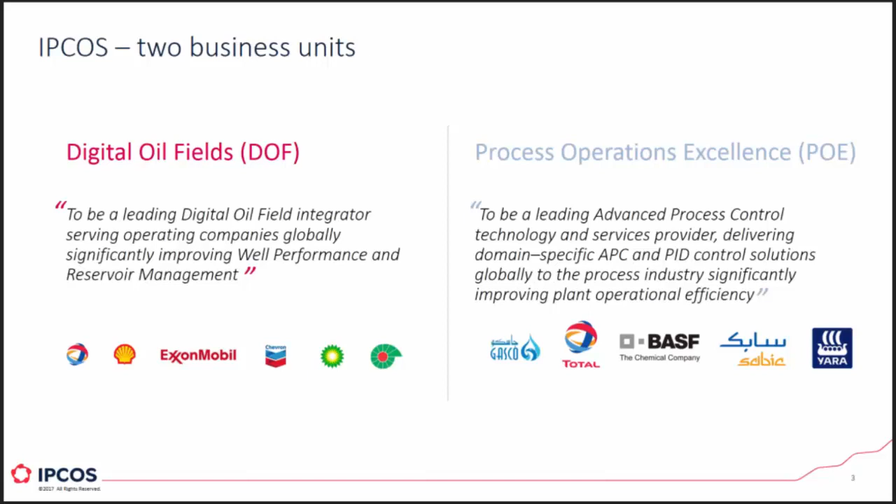In terms of our offices, we have our headquarters in Leuven in Belgium, and we have also offices in the Netherlands, in Cambridge, which is where I'm based in the UK, and we have partners around the world, and also a small office in the United Arab Emirates, a slightly larger office in India, and also a small office in Houston. So really a large reach with several locations and obviously customers spread across the globe.

Our core market is gas processing, refining, petrochemicals, chemicals, and really an emerging area now is power, waste, and utilities. That's a big part. And fertilizers and ammonia is where a lot of our APC technology is being implemented. So really, again, a wide segment of industries that we serve.

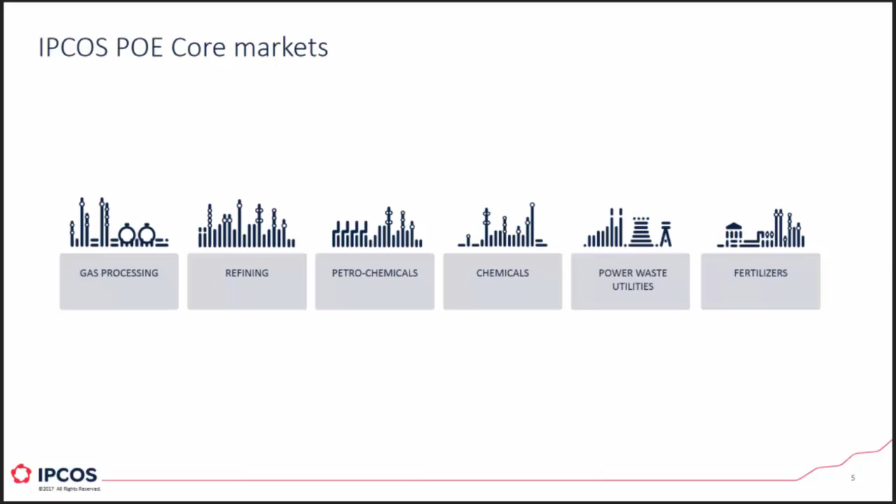In terms of our partners, in specific markets, we have partners such as Stamicarbon. In glass, we have Celsian. In cement, we have ES Processing, and we have some generic partners such as Siemens, AspenTech, and we really work with them on a case-by-case basis. We have also partners in the Middle East, such as BPC and Golden Falcon. They are, you could call them agents or partners in the Middle East, serving different countries. And we're very pleased that, having been a reasonably small company, we have a global reach.

In terms of our products, we have 2 PID tuning products or softwares that we have developed ourselves and we license. They're called Inca AptiTune and Inca PID Tuner. Inca AptiTune is a multivariable PID tuning tool, and Inca PID Tuner is a tool that is used for tuning single PID loops. Then we have Inca MPC, which is our multivariable process control software, predictive controller.

And we have Inca Sensor, which is the software used to develop inferential qualities. So if there is a product quality that you would like to measure, but there is no analyzer available to do that, then you would use a software such as Inca Sensor to build a model which can then be used to do the prediction of that particular quality.

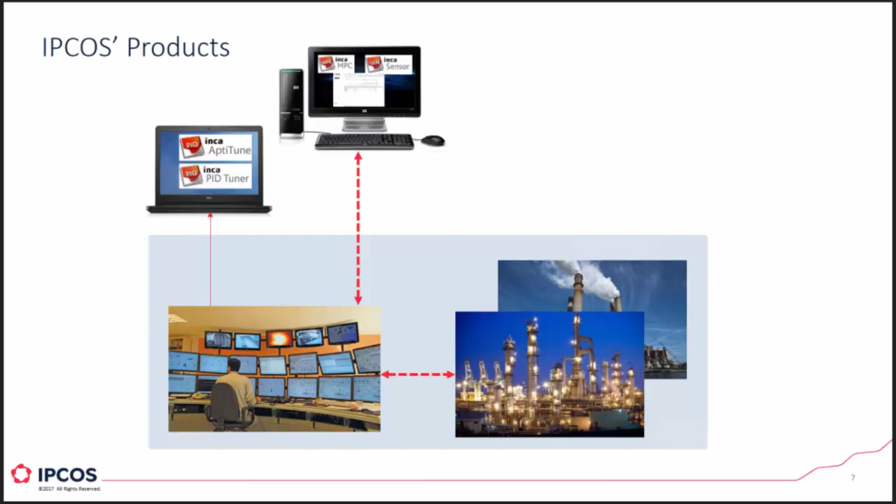We are going to start off with the big part of the presentation, but before we do that, I would like to have a little poll question about what tuning methods you use at present. So if we just open the poll now, you'll see something pop up, and we'll give you about 30-45 seconds to respond.

You've got a few options there: standard settings, trial and error method, heuristic method, rule-based method, and dedicated software. This is really to get a feeling for how people are doing tuning at present.

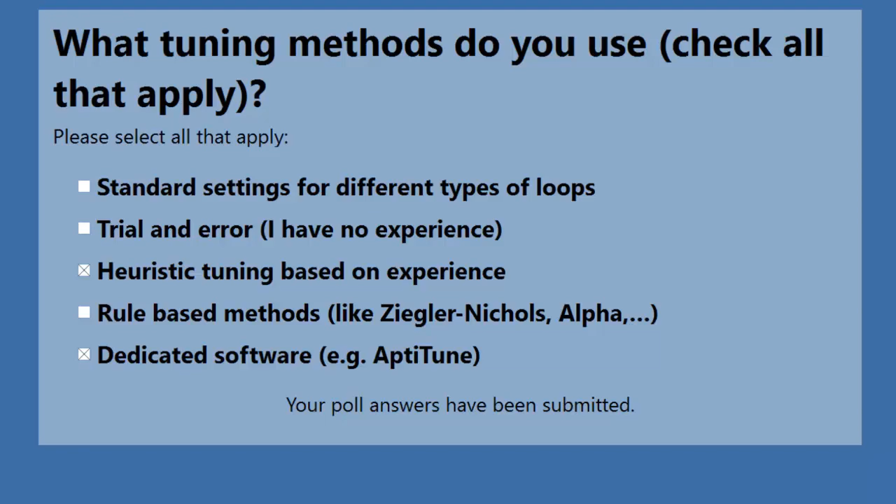That would give us an idea of at least this audience in terms of what we use. So I think we have about 70% of the people who voted so far, and we'll give it another 10 seconds and then close the poll. Okay, I think people are still voting—76% have voted so far. We'll close the poll in about 5 seconds.

So we've got 76% people who voted: 34% use a standard setting, 47% use trial and error, 42% use heuristic tuning-based methods, 33% rule-based, and 19% software-based methods. Which leads me nicely to my first slide.

This is really about why we want to do tuning. I think some of us would have experienced, for example, commissioning of a new plant.

During that process, it's quite a hectic period where there's several activities going on—construction works, laying of cables, etc. The last thing on people's minds is actually to tune PID loops and get the plant up and running. However, this often missed activity is probably extremely important and would help you set your plant up, stabilize it, and commission it much faster.

So what we found in our experience working on several different plants is that 70% of the PID tuning parameters are default values that were put in when the plant was commissioned. So really, that's not good enough.

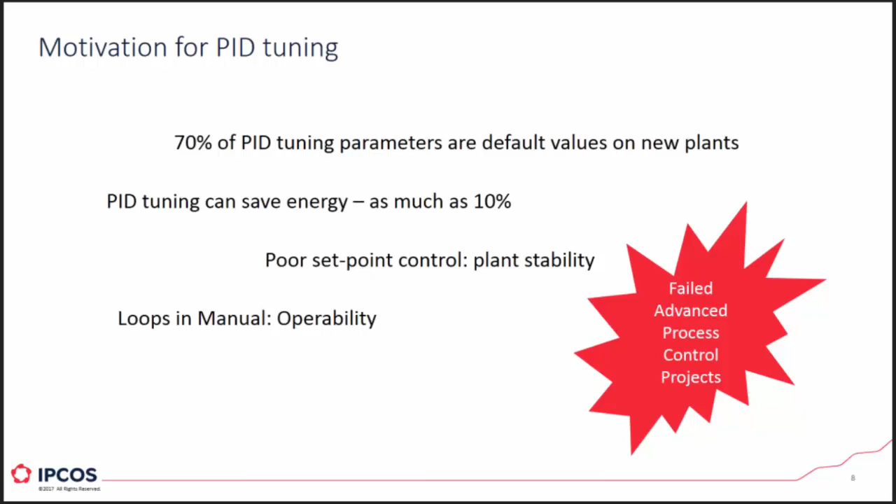So what are the symptoms of poor PID tuning? Poor operability—you have high levels of operator intervention. The operator is constantly having to change set points, or he's sitting at the edge of his seat when there's a change in weather outside, or a change in feed rate or type of feed. That's one of the symptoms, or one of the causes could be poor PID tuning.

Excessive alarming is another one, where you might find a lot of process variables are straddling the alarm area quite often, and you're pushing against the operating envelope constantly. That's also not a good thing, possibly because you have oscillating variables that are going in and out of alarm all the time.

Product giveaway and reduced production capability are also issues—this is directly related to the profitability of your assets, so really you don't want to be doing that. And obviously there's the underperformance of an advanced process control system that you might have.

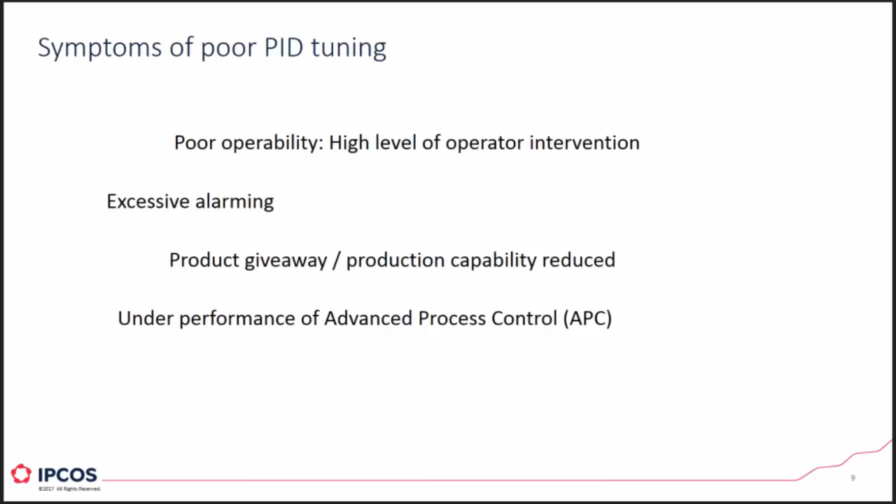When should you be tuning PID loops? Well, we touched on this in the first slide. Once you've commissioned a plant, that's a good time to do it.

Typically, DCS vendors will come out and do that for you. But most of the time, they are rushed to hand over the plant to you as the company operating it, and they might not do a thorough job. So you might be left as the engineer on the plant to deal with some of those issues. So it is a good opportunity to do this systematically.

After a major turnaround, obviously, if you've got new equipment that's come in, or you've retrayed columns, all these things will affect how your base layer performs. So it's always a good time to check things out.

If you've had a new DCS, or new instrumentation put in, like new valves, or even a changeover of DCS from one type to another, you can imagine the algorithms are different, and you would want to transpose the tuning in the DCS from one type of algorithm to another.

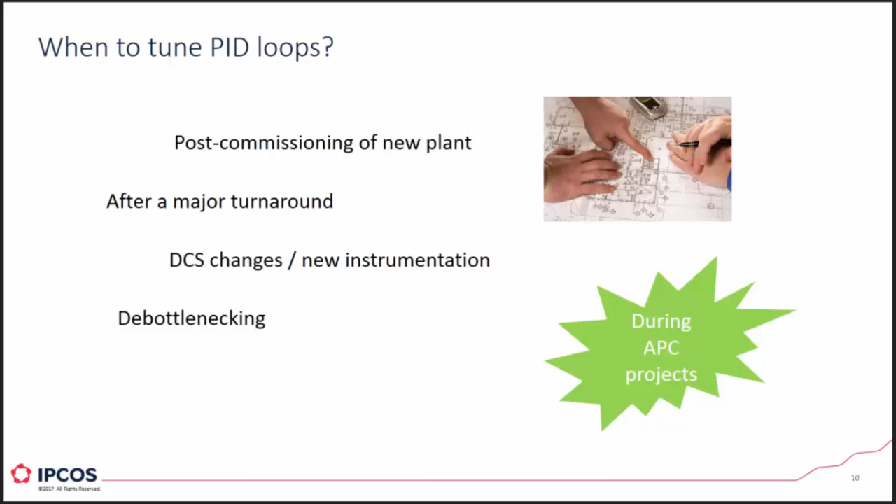Debottlenecking is another opportunity where you might come across the need to tune loops. APC projects are typically a good opportunity as well, specifically for that particular process unit where you are going to be implementing your APC. You will spend time making sure the base layer is tuned correctly before you move on to building the advanced process control system on top of that.

So interacting PID loops, what are they? How do we look out for them? I've got a few examples here which might give you an idea, and hopefully some of these will be recognizable to some of you, giving you an idea how to identify these interacting PID loops.

So you might have a heater with multiple passes. Let's say it's a heater with 4 passes, and then they join up, and there's a temperature controller at the end, which is cascading onto a fuel gas flow, if it's a fuel gas fired heater. In that kind of situation, all the passes interact with each other, and the pass flows also interact with the temperature at the outlet. You will not be able to tune that optimally.

So the operative word is optimally. You can tune it, obviously, but it will not be optimal tuning if you treat that as separate PID loops. If you tune each pass separately and the outlet temperature controller separately, you will get some tuning that works, but it will not be optimal for all the different scenarios.

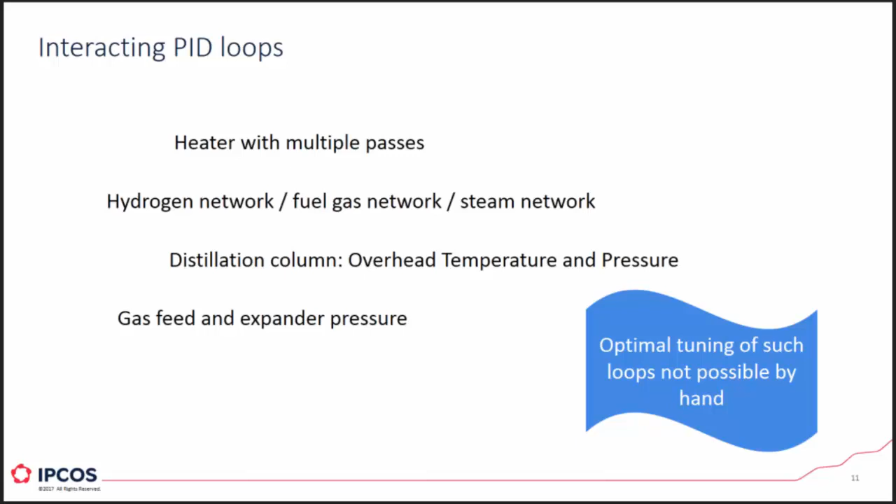Gas feed and expander pressure - this is a very specific example in gas processing, where you have a gas feed at the front end and an expander pressure at the back end of the process. One would expect these things don't interact, but in fact they do. It's a good example of where you'd use multivariable tuning, because these two loops interact with each other. These sorts of problems require a different approach to get optimal tuning. So let's get into some case studies.

This is a gas plant in Saudi Arabia - a hot oil heater outlet temperature. There are 2 heaters on this facility, providing hot oil that circulates through the plant and provides heat duty to several of the distillation columns.

You can see here the blue is the temperature process variable, and the green is the set point. It's swinging around - the scale here is 315 to 325, so that's about a 10 degree swing, but typically you're looking at anywhere between 5 and 8 degrees swing in the temperature. This is clearly not good for the consumers, because product qualities are being affected.

What we did was look at this whole problem and tune it using our technology, and you can see the before and after trend. There is still a little bit of a cycle - a degree or half a degree perhaps, a degree at most in some cases.

By just fixing this single problem, there were significant benefits that the customer reported, greater than $150,000 per annum. Those benefits are coming from the process units being able to control their qualities much tighter and pushing them towards their real limits.

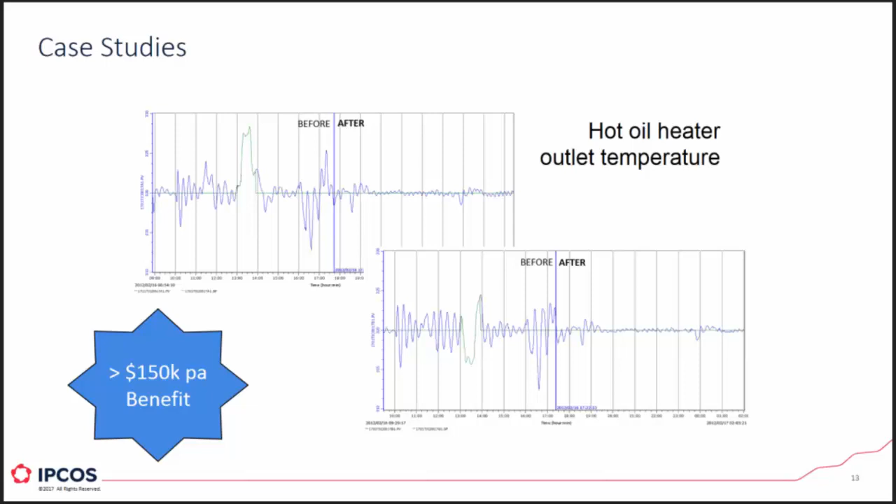The second example I have is on the same plant, and this is a propane compressor. If you can imagine a gas plant, what happens is you want to chill all the molecules coming in as much as possible and recover all the liquids, then send the gases to a fuel gas system or network, which is consumed by power plants, etc.

What you have here is the suction pressure of this propane compressor, which is really the indication of the chilling capacity available. It was in manual, which means the suction pressure, shown in green, is moving around all the time, and the control variable - the speed of the compressor - was fixed. Obviously if the suction pressure is moving, the temperatures are moving around in this gas train, which means you have very poor control of the chilling and the quality subsequently.

So here we put it back in automatic - this is a plant, going back to my very first slide, that was commissioned recently, and they were never able to put this compressor in automatic, because every time they did that, the whole system became unstable. So the operators just said, okay, we'll keep it in manual. You can see immediately, once we were able to tune it correctly, we got this on control very well, and subsequently all the other associated variables became much better in terms of their controllability.

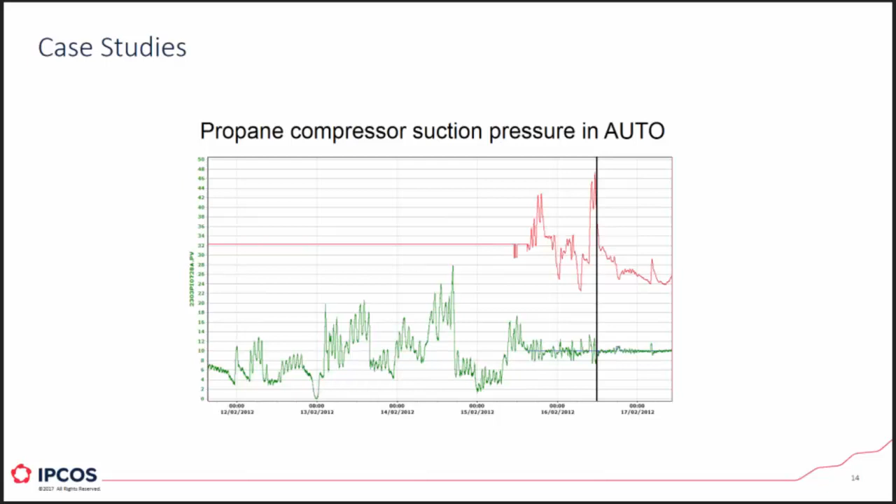We have an NGL recovery plant - this is another gas plant. This is a feed and expander type of arrangement where you have the gas feed coming in at the front of the plant, then it goes through chilling and heat exchange. At the back end you have a pressure, an expander pressure, and these two interact with each other, as will be clear from this model.

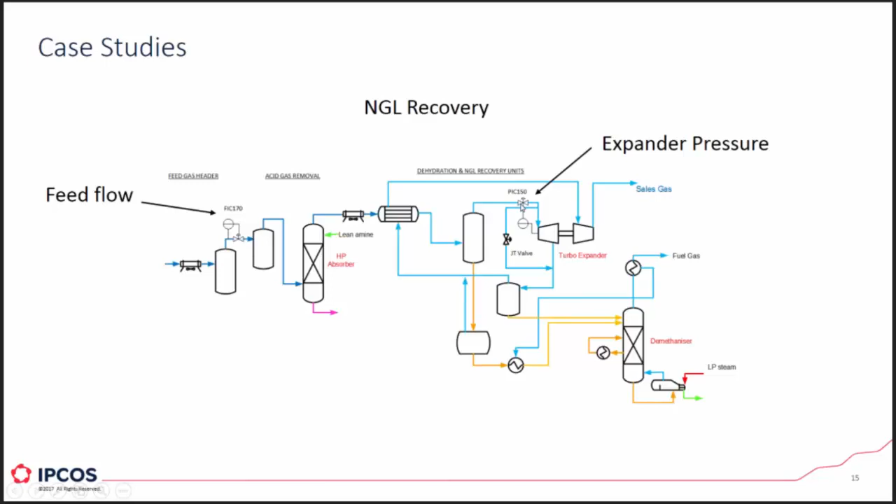What you see here is that if you increase the flow valve output, its own flow increases, and also the pressure in the expander increases. And if you increase the pressure valve output, the feed flow also increases, the PV, and the expander pressure reduces. The way this model is generated is, you imagine these two valves - the flow valve and the expander - are in manual at the same time, and we make little step changes in each of them and observe the response, which is what we see here.

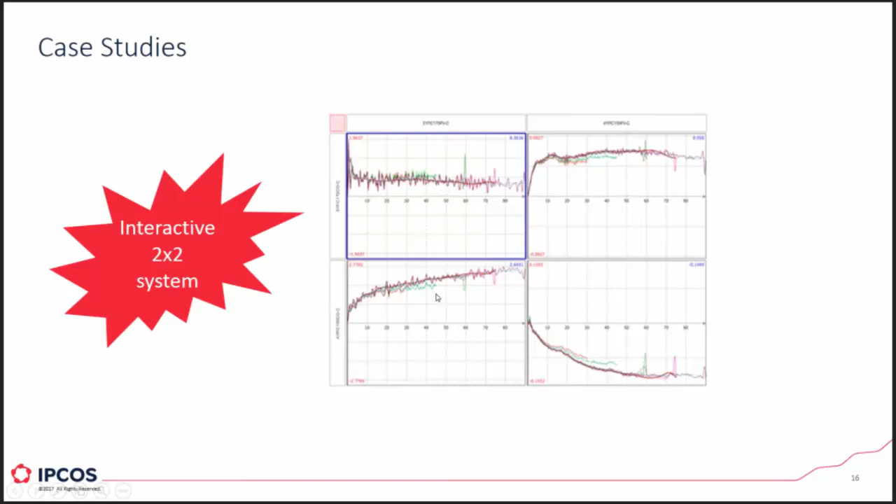So this is an interactive 2x2 system. If you were to tune these loops separately, you would never get them right. So we ran this through our software and got some tuning results. This was an ABB DCS - the blue is the previous tuning and the red is the new tuning.

You can see that it's nicely damped, and it gives a really good disturbance rejection response as well.

And the variables you can see are quite different, the ones that were initial and the final variables. And that's the other thing about using technology to do the tuning, is that you can have confidence in the tuning that's generated, and you can input it almost directly without making any changes.

It can be a little bit scary for operators, in which case you would put it in sort of a step at a time, but the end parameters really need to go in the way they are in order for you to really reap the benefits of the optimal tuning.

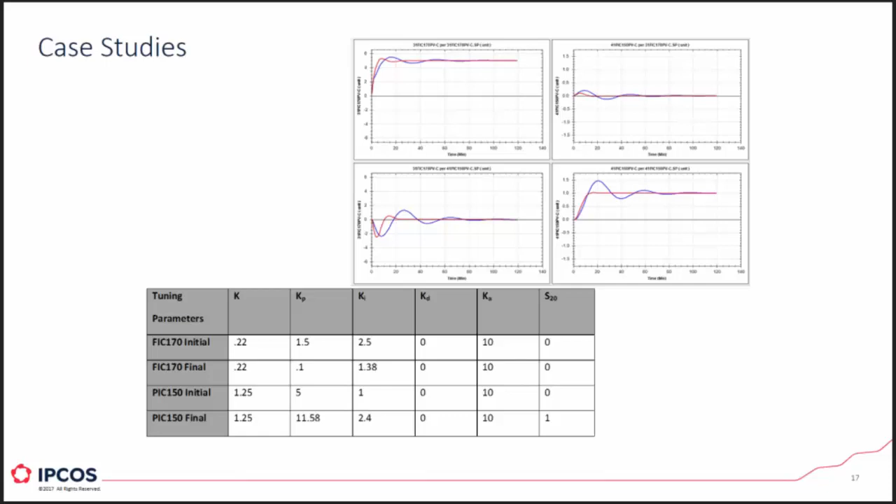And what we have here is the benefits in terms of dollar values, really very significant, because you can imagine on an expander, on a gas plant where you want to maximize the feed, if you're able to have very tight tuning, then you can push these set points really close to the constraints that are on the plant.

And here it's hard to see with the naked eye sort of what the difference is, but certainly in the blue one, which is the expander pressure PV, and the green is the set point of the expander pressure, you can see that there's an improvement in the variability, and even a small improvement ends up in huge amounts of benefits for these sorts of facilities.

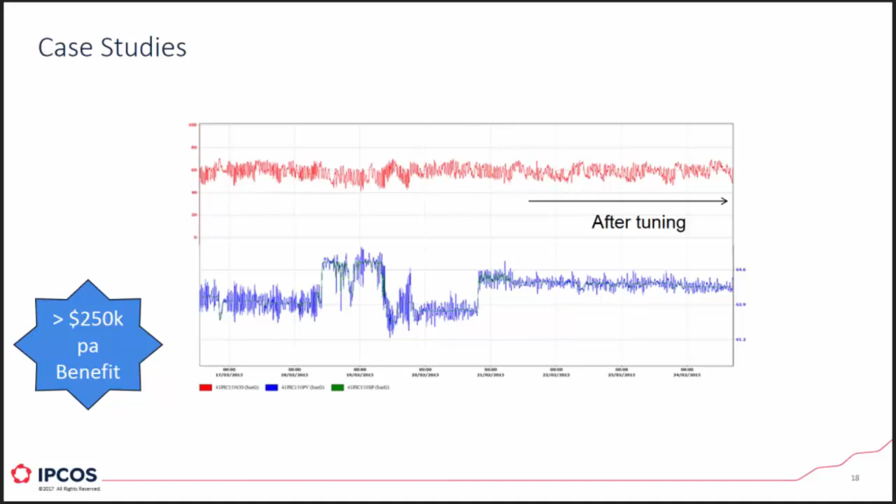Okay, a couple more examples, and we'll get into some other tips and tricks, etc. Feed balancing. This is an interesting one.

I think you would all have this sort of a problem on your facilities. You've got multiple flows or flow valves on a single pipe, and it's a distribution, in this case, of sour gas from a sour gas header to acid gas removal units. So you have 3 acid gas removal units. There's 3 parallel flows, and this is an interactive 3x3 system.

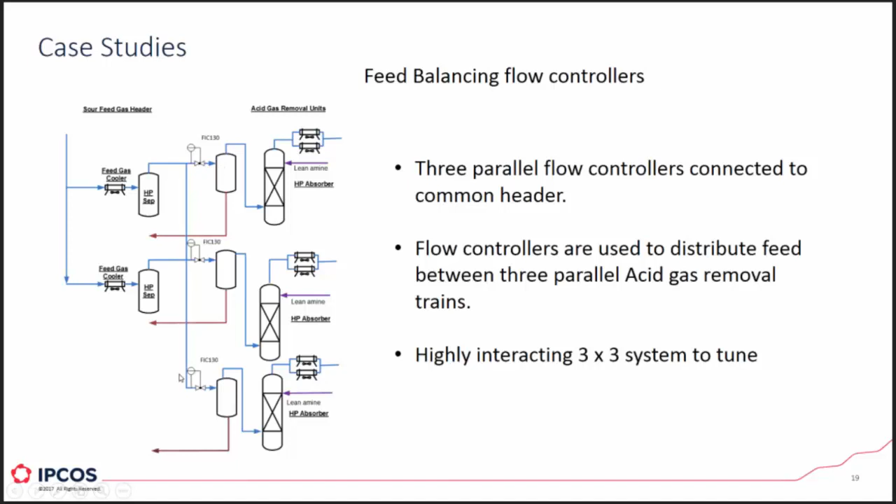So again, highly interactive. You could tune this manually, and a lot of people would, but you would never get it right, because if there were small changes here and there, you would find that it stopped working properly, and then you have to retune it. This way we understand the basics and then build the tuning on top of that using the technology.

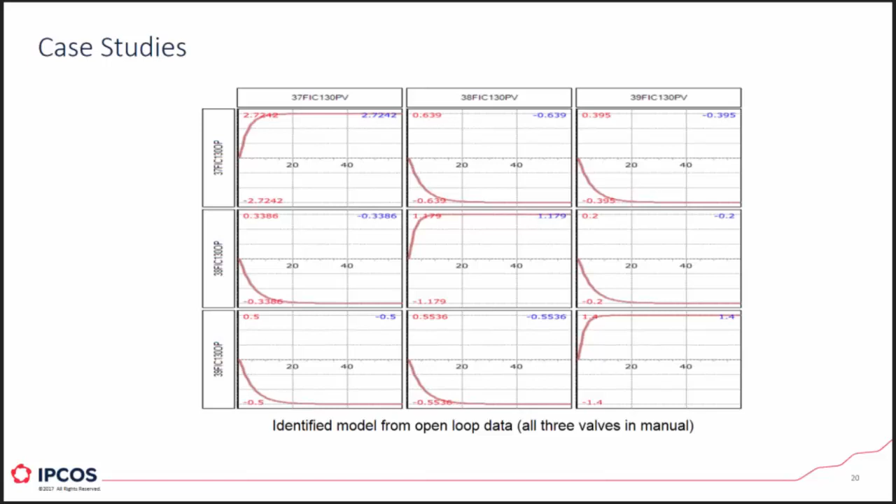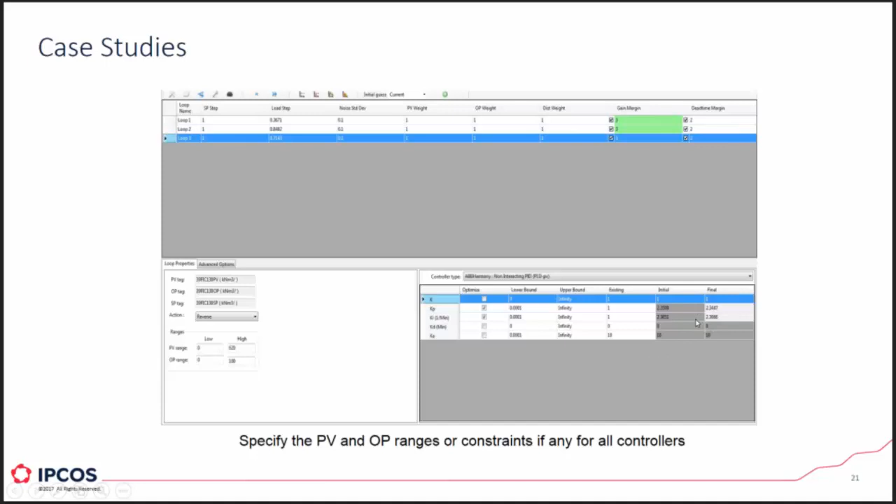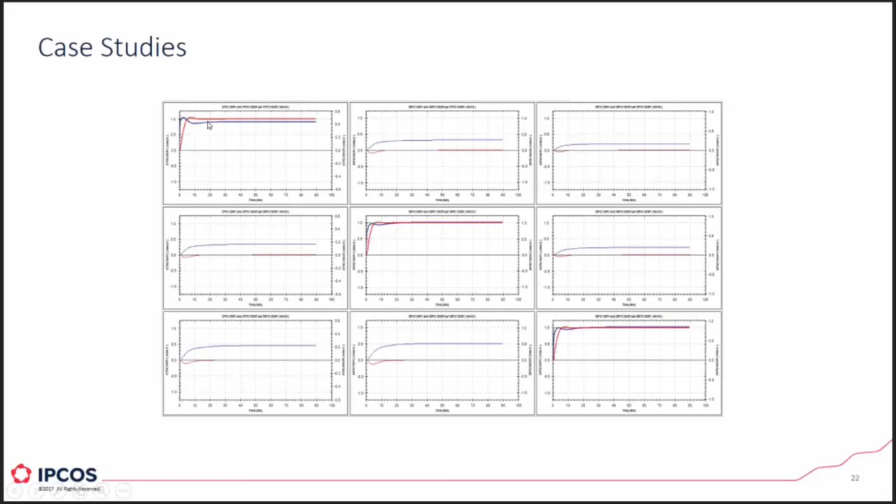And this is a simulation of the result. Again, you can see how the behavior looks like with a set point change. The red is the PID, the process variable, and the blue is the valve output response.

So if we have some basic default parameters for gain margin and dead time margin. However, if you increase that gain margin and dead time margin, it will mean that you are creating a more stable tuning that is valid for a bigger operating range of that particular part of the plant.

So in practical terms, what this means is that the model can change. For example, if it was a heat exchanger that's fouling, you know that it's going to foul in 12 months time. Over time there's a certain amount of fouling. You can actually factor that into the tuning so that you have stable tuning throughout the life of that exchanger until it's cleaned again, and then it's back up and running again.

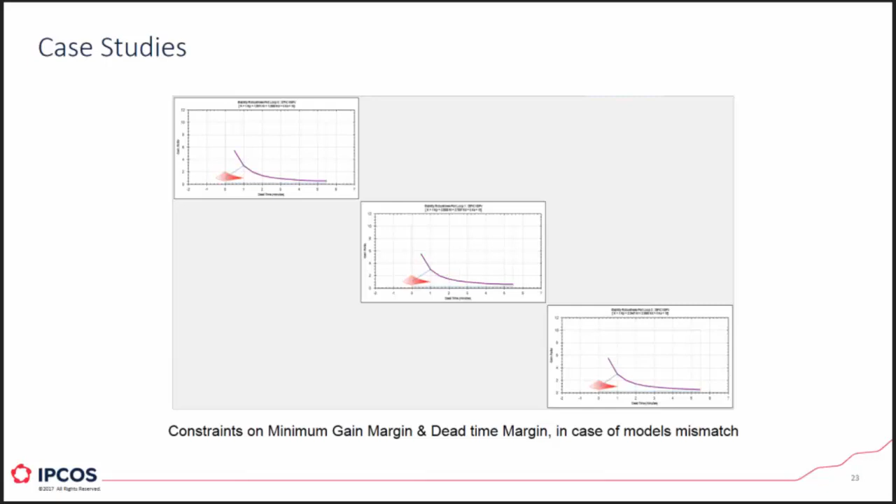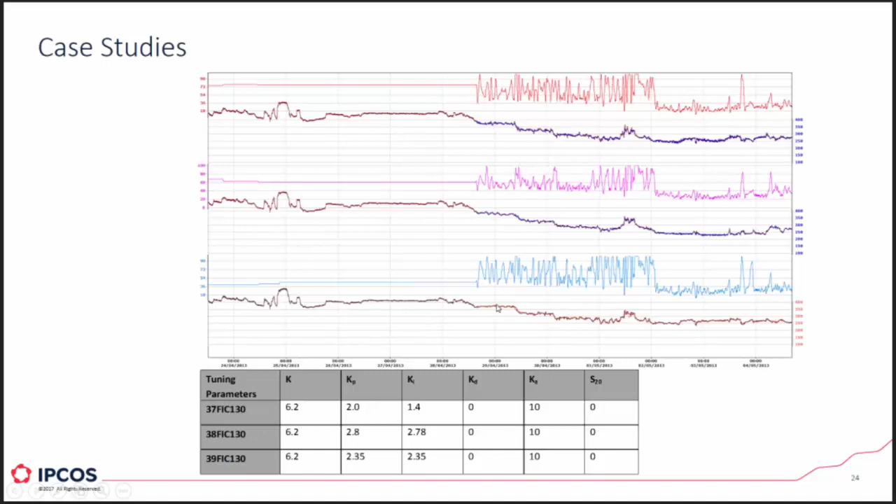And this is a before and after. I think the important thing here for these flow controllers is the fact that you are able to put them in automatic, and the operator can actually control the set point and set a desired value for those flows. There's no before and after here, because this is one of those examples where they never actually put it in automatic because they were not able to.

This next example is again a very different kind of example. This is a gas distribution network, and really they take gas from several different facilities and distribute it to power plants, and their sole reason for existence is to make sure there is a continuous flow of gas available to these power plants, because these power plants then generate electricity for a very large city, and if there's problems in the gas distribution, then the lights go out.

So it's fairly critical. And what we found with this client, they came to us and they have multiple sets of valves and multiple services for these different loops. So each PID loop could be configured as a pressure controller and a flow controller. We were able to set those up and tune them correctly so that they could operate this whole network of pipes and valves efficiently and effectively.

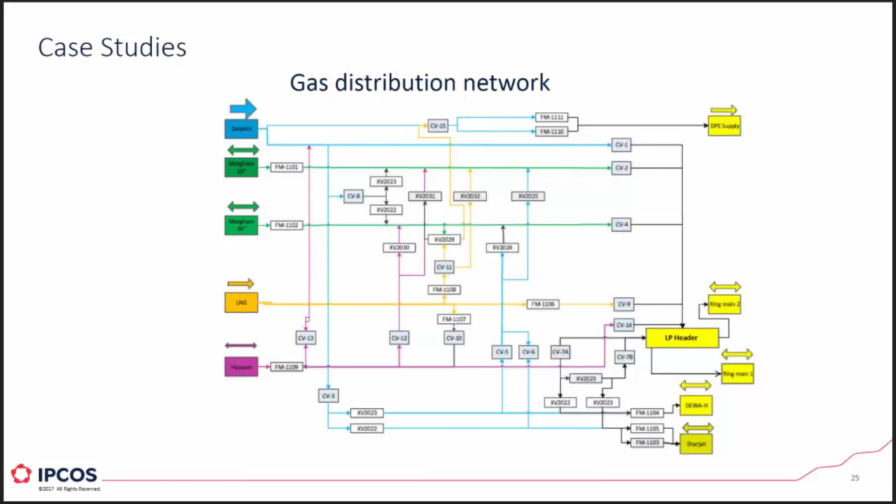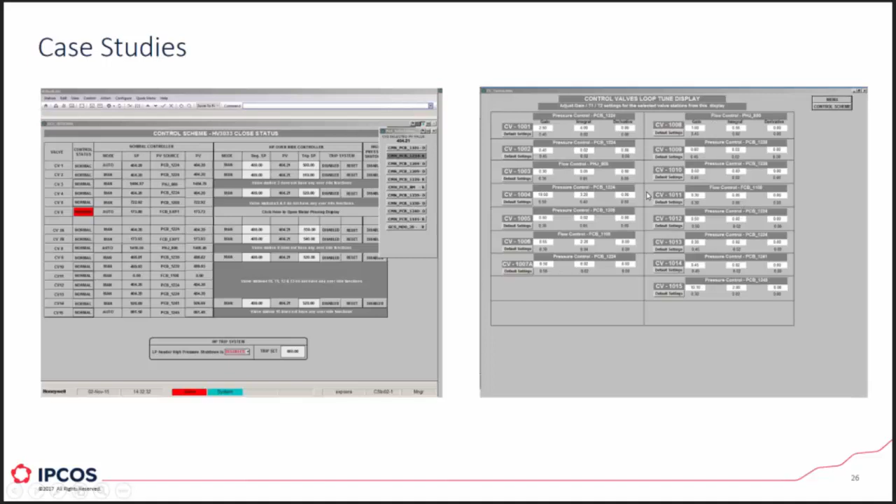What we did here was we improved the pressure control of this header at 410 psi, which was the operating pressure. So we pushed close to that and maintained it. We reduced valve chattering. All the PID loops have been set in auto for over 24 months now, and they were always in manual previously.

There's more line pack. They can maintain the supply for longer periods of time in terms of the pressure. So you can imagine if some of the incoming gas drops off for some reason, there's a problem with the supply side, then because of the line pack they can maintain the supply for a longer period of time, which means the lights don't go out.

And an improvement in the pipeline life. This is something the customer reported as well. So really, in this example, you could allocate a lot of benefit in dollars, but I think this is very much to do with criticality of an infrastructure that has been improved significantly. The operability has been improved significantly because of really improving the base layer PID tuning.

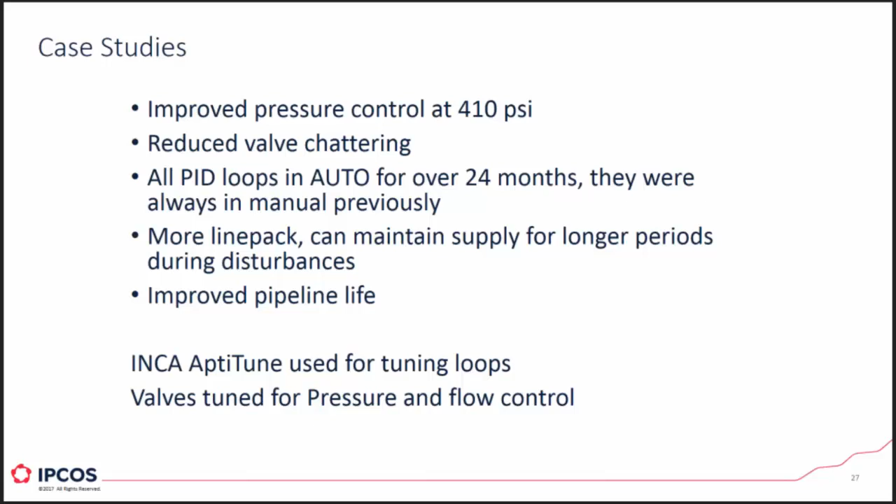We used our INCA AptiTune PID tuning tool for this, and the valves, like I mentioned before, were tuned for pressure and flow control. So we did that for both of them.

So let's shift a little bit and talk about tuning itself. I think a lot of you, as was suggested by the polls, look at doing sort of tuning yourselves. And there is the quick tune option.

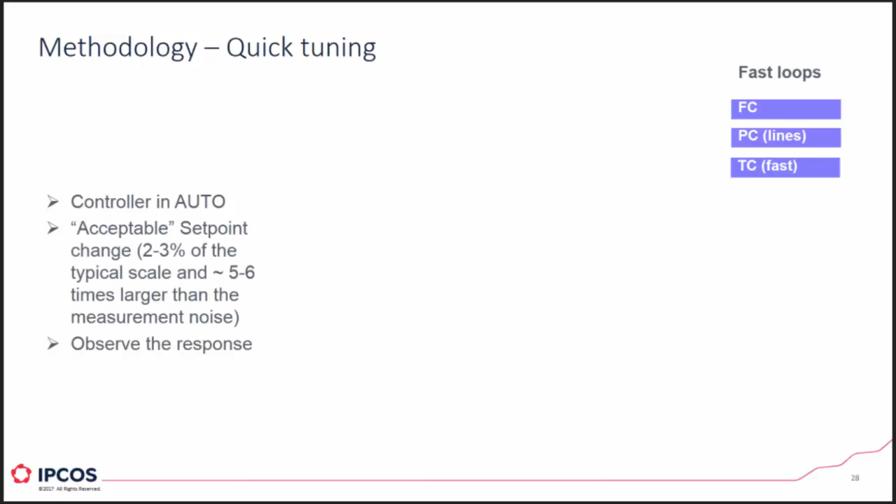So we make a set point change and we observe the response, and then we tweak the proportional action or the integral action. Typically we don't use derivative action. If it's slow, we observe it visually, and we might increase the proportional action, in which case it might become a bit too oscillatory, and then we might reduce the proportional action.

If we have a bias, an offset, then we know the integral action is not enough, and we might increase the integral action, in which case it starts cycling, and we would tweak it a little bit more until we end up at a response which is reasonable. In general, we don't use derivative action, but sometimes we do.

So this is the typical, very simplistic way of tuning, and we are all doing this using either a visual method, or we collect some data and put it into a spreadsheet using some kind of spreadsheet method. There are lots of them available. There are also DCS vendors that have their own sort of methods, so this is the typical way of quick tuning.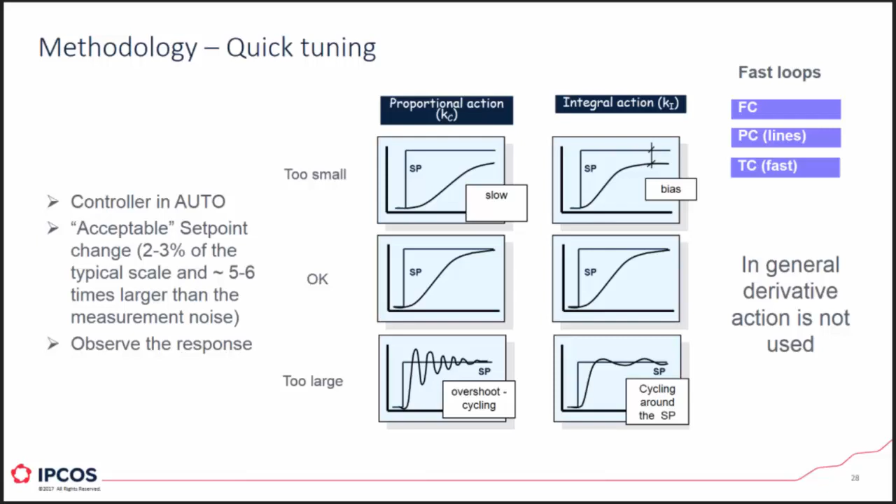Now, if you look at model-based tuning, which is what some of the examples I showed you with those interactive models, what we want to do is identify bad acting PID loops from historical data or operator information, or you might even have a PID monitoring software that gives you this information. We want to be able to understand the process and the interactions available.

We want to collect the data at a 10-second frequency, for example. And then if you have a 2x2 system, or let's take the example of the 3x3 system where you have those 3 flow loops that were never put in automatic, they were in manual, you would make steps in those valve outputs one by one, collect the data, then build the model and calculate the optimal tuning. So this sounds cumbersome, but actually it doesn't take a lot of time.

The first time you might need to set things up in terms of data collection. Perhaps if you have the ability to collect data in Excel, that is good enough. In our case, the INCA AptiTune tool can import that data straight from Excel into the technology, and then we can do everything in there up to the point where you get the optimal parameters.

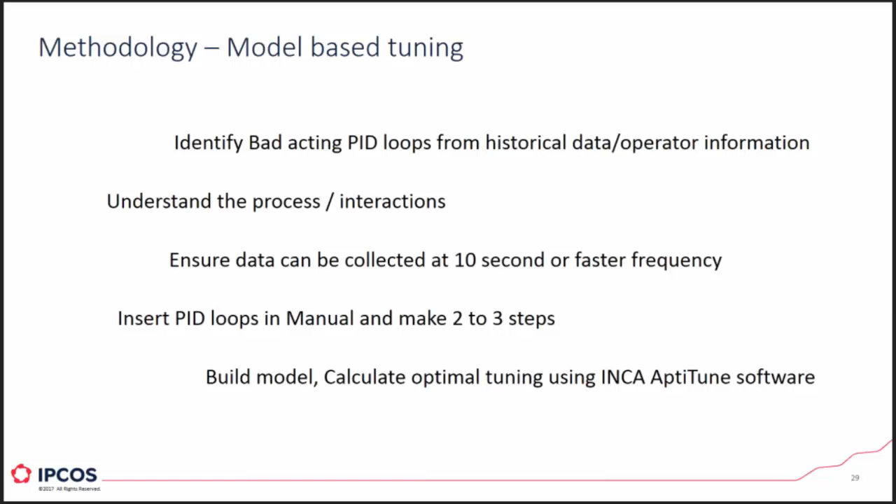So that is a different way of doing tuning, and I would suggest that that is the more rigorous approach, and that is really the way to certainly tune the more difficult problems.

So let's look at some tips and tricks. Let's start off. As you know, a PID loop really is looking at the process side. So there's the measurement. We must make sure that we understand that the measurement is working correctly.

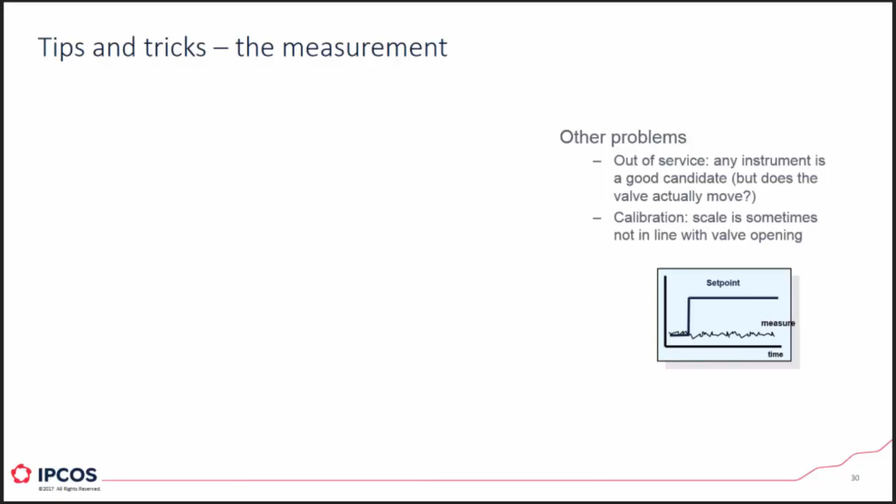You will have noisy measurements, for example, in flows, levels. You could have analyzers that are frozen and spiky, and you might have instruments that are out of service. You might have calibration that's going on. So we need to understand that the measurement is working correctly when we are looking at these PID loops, tuning them, or fixing them.

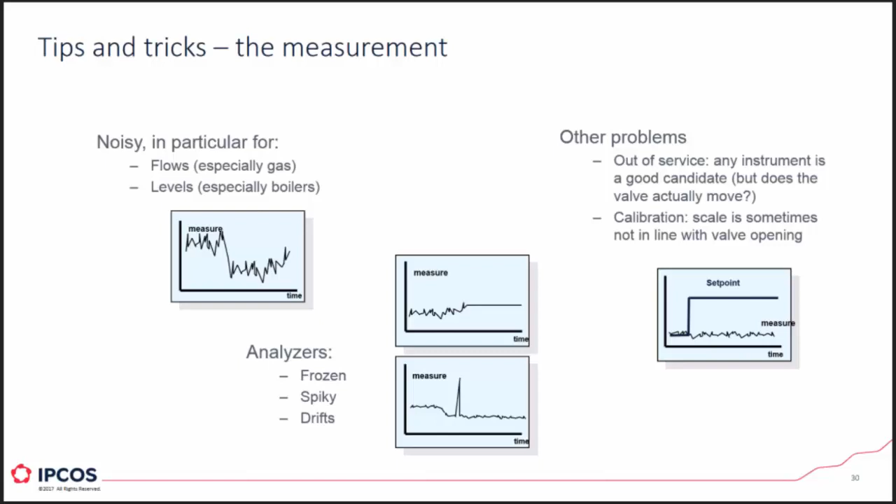And quite often these measurements are not a problem, but sometimes you will need to investigate them further and do something about them. So if you are looking at measurements that are noisy, then you want to be able to filter them. And if you want to filter them, then what you want to do is put the controller in manual. You want to trend the measurement by looking at some scaling, and then superimpose the raw and the filtered signal on the same trends to understand if the filtering is appropriate.

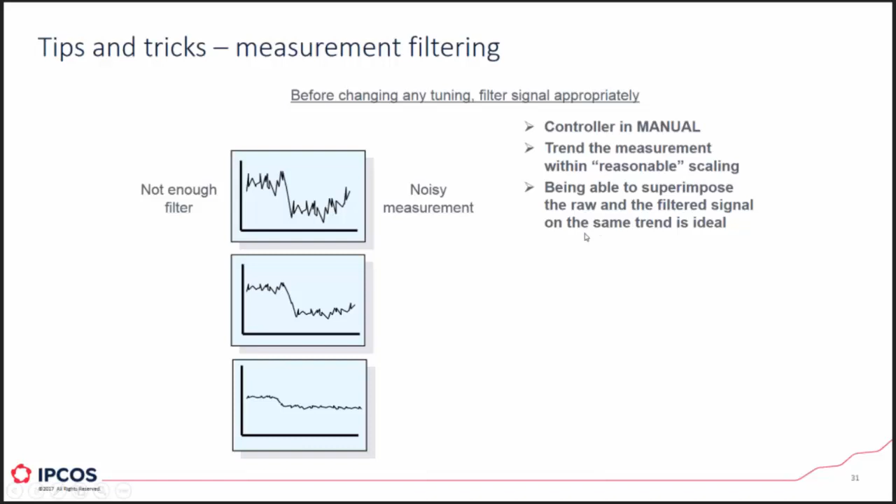So maybe there's a noisy measurement, and then maybe there's too much filtering in this case, and then this one is perhaps appropriate. There are some typical values that you can use, and I must stress these are not magic numbers — these are typical values based on experience. If you do need to filter, then filter the flows not more than 0.3 minutes, pressures not more than 0.1 minutes, levels, etc.

But as always, you need to do your due diligence. You need to check yourself what service the measurement is in and whether it's very noisy, and it could be that the position of the sensor is incorrect, which is also something you might want to look at as part of improving the whole system.

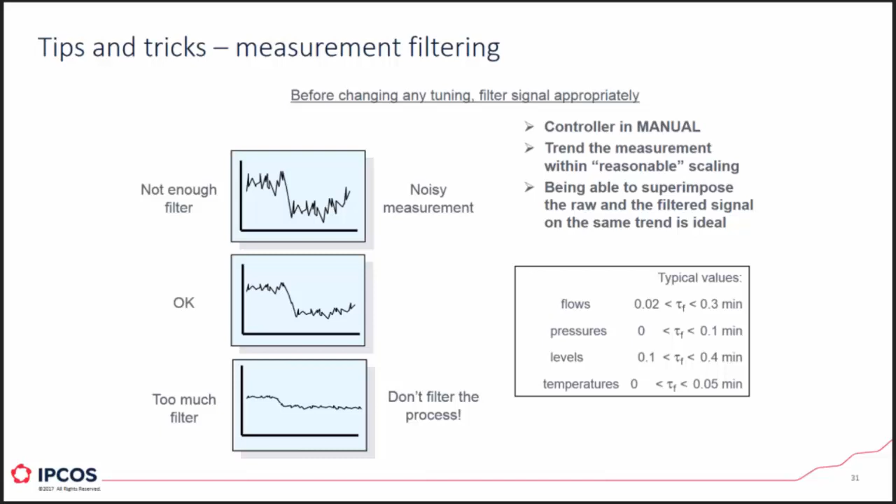Now we look at valves. As we know, valves can be problematic. You have different types of valves, and you have stiction problems, oversized and undersized valves, non-linearities. You could have control ranges not good enough, and you could have missing positioners. So these are all problems that you'll come across.

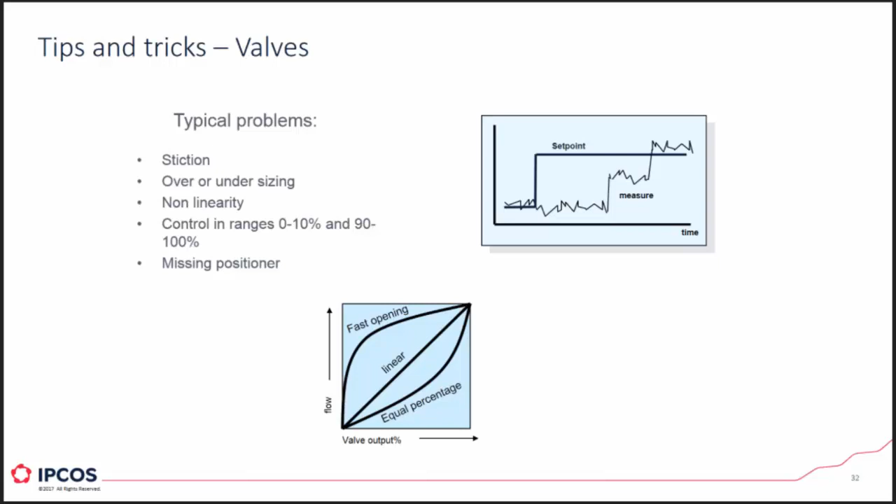And the point here about valves is that, again, a valve is a part of the PID loop. So measurement, valve, and all the other things need to be looked at when you are trying to fix a PID loop. Typically these are not areas you would get into because you would assume that a lot of the time these things are working correctly, but don't overlook them — that's the point here. Try and get to the bottom of it by checking these typical problems.

So what can we learn from PID tuning, or certainly what have I learned over the several years of my experience doing this kind of thing.

It's important to take a systematic approach. Start your tuning exercise from the front of the plant to the back end of the plant. You need to collate the information, look at data from the process, and talk to people about what's historically happened in certain parts of the plant. Maybe things are not working well, and that's why they put the loops in manual.

As an engineer, you need to collate all that information, come up with an understanding, and then tackle the problem. These days there are several tools available that can collect the PID loop performance information for you and present it to you. But it's important to stress these PID loop performance softwares are not magic. They don't fix the problem for you, they just tell you where the problem is. You still need to go out there and fix things. It's not push a button and everything works fine.

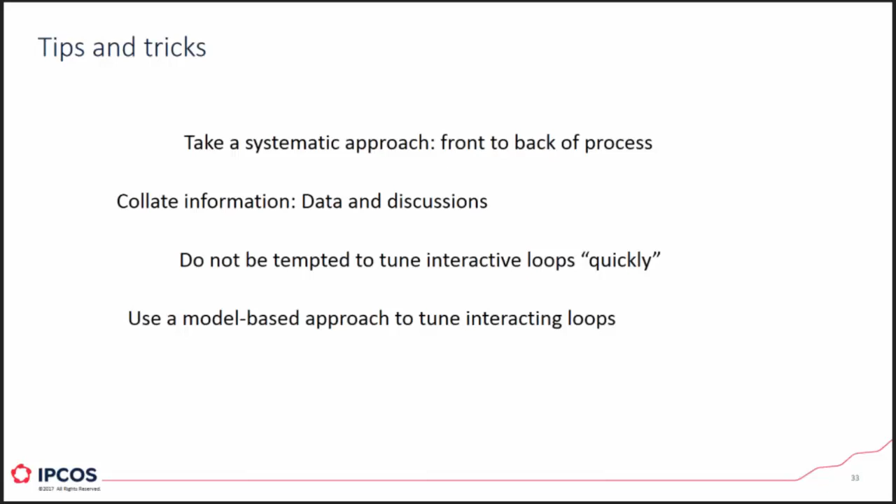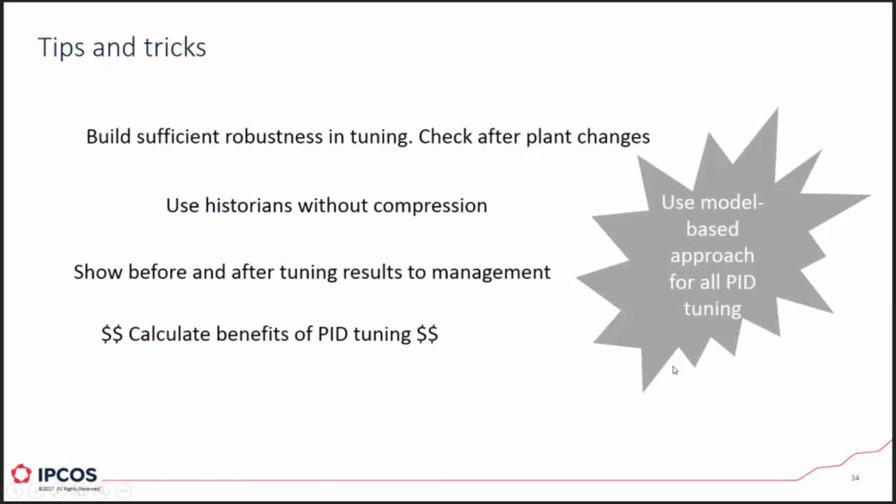Don't be tempted to do a quick tuning the way you have been used to. Try out a different approach, see the benefits, spread the message across your organization so people are a little more aware, and shine a light on this.

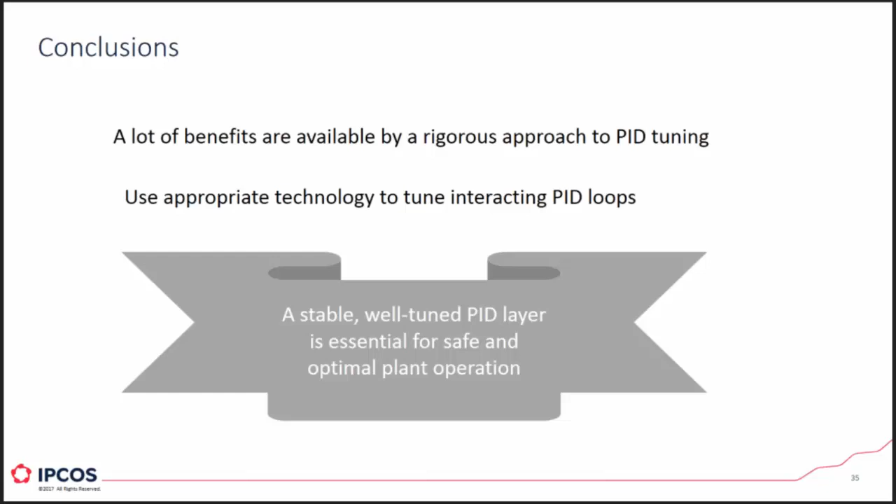And obviously a stable, well-tuned PID layer is really essential for safe and optimal plant operation. So this is really something everybody wants. We talk a lot about safety, we talk a lot about optimization, but not in the same sentence as PID. I think we need to start doing that.